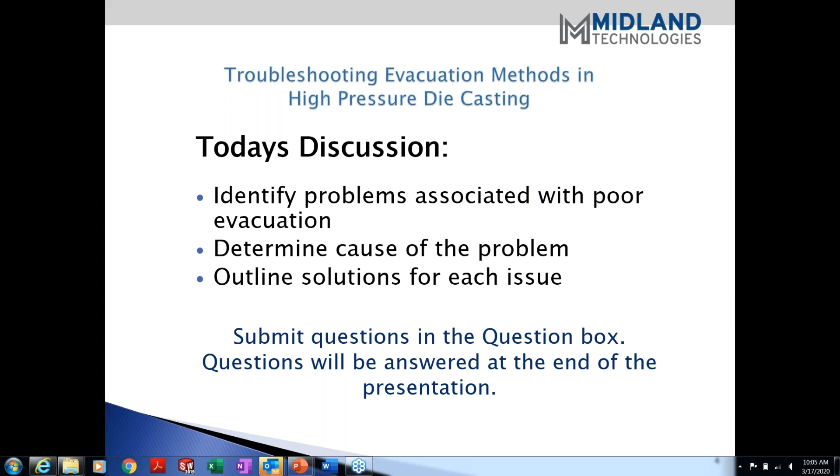So our first thing, look at what defects are related to the lack of adequate evacuation. The first part is surface defects: cold flow, cold lap, chill, non-fill, and swirls. Larry, can you go over a little bit more description on that? Sure. These defects are related to evacuation of the cavity. They can also be influenced by the amount of time it takes to fill the cavity, in other words, the cavity fill time, and also the temperature of the metal or the temperature of the tool itself when the metal enters it.

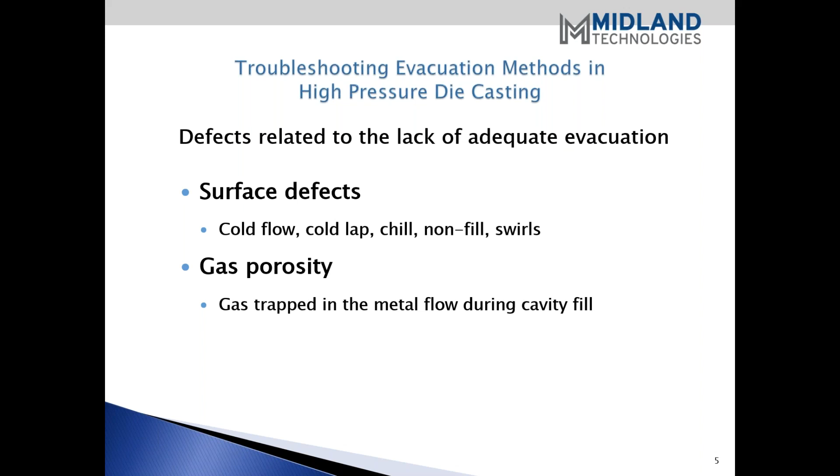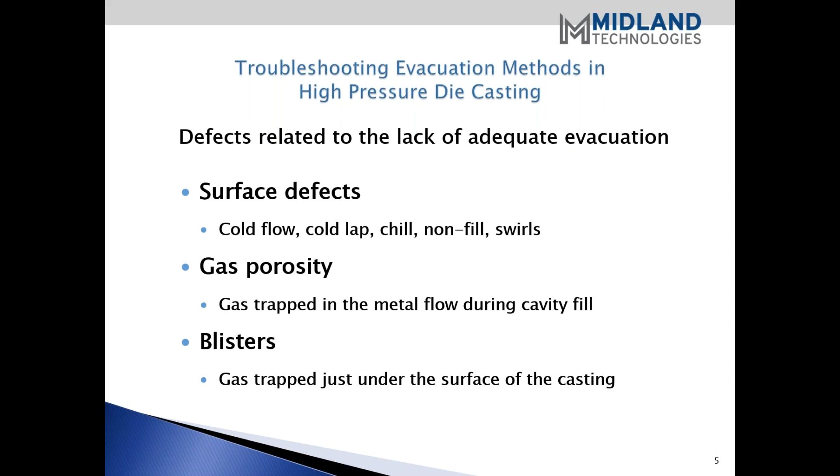Excellent. And then we also have gas porosity, which is very common. That's where the gas is trapped in the metal flow when the cavity is being filled. Blisters can also be developed, and blisters are gases trapped under the surface of the casting. And then we also have outgassing, a surface finish defect that occurs when bubbles appear during painting, plating, or other finishing processes.

And there's stained casting, which is a discoloration of the casting, and edge porosity, which is the coarse porosity at the gate. Larry, can you fill in more details of these types of things? Sure. Outgassing, of course, if you're in die casting and you're finishing parts, you're familiar with that condition.

It's internal porosity trapped in the casting at the time of solidification, and this porosity is generally closer to the surface of the casting, although the entire casting outgasses for the life of the product. Die casting just doesn't stop outgassing. It continues to outgas if you don't use some means of minimizing that gas during your injection of the metal, or it can be addressed at a later time.

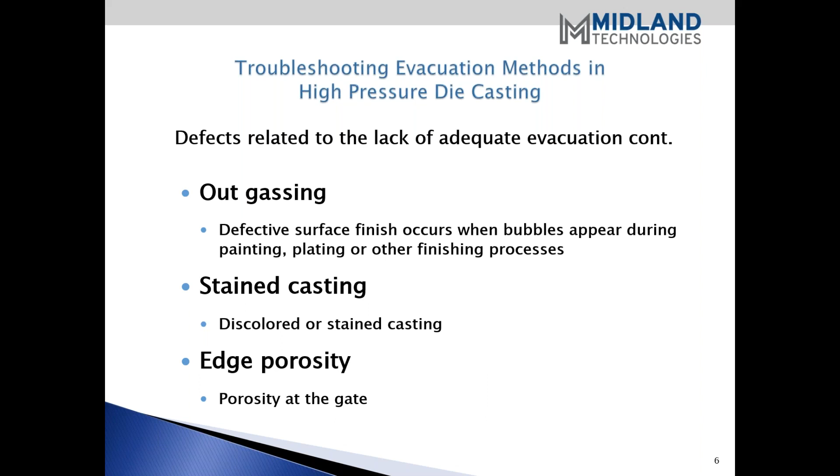Edge porosity, just as it says, is gas trapped at the point of the gate. It can occur around the periphery of the casting in different locations, but it's mostly associated with temperatures and/or the cavity fill time. So again, we can minimize that by having proper evacuation. And that's about it. Excellent.

Good. Okay, so the first one we want to discuss is insufficient evacuation, and there's a number of possible causes here. The first one we have is the improper size calculation of evacuation area. And this could be whether you're just venting or using a vacuum assist as well. And Larry, if you can kind of go over the solution for this cause.

Sure. The solution in this case, we have some proprietary software that calculates the area required to evacuate the cavity. And the attributes we use in those calculations are associated with the casting itself and the machine parameters. By performing these calculations, we use PQ squared. We arrive at a cavity fill time. We arrive at the area required to evacuate the cavity in a certain amount of time.

So it's important that some type of calculation be arrived at, and hopefully you would come up with some quantitative method of collecting the data to assure yourself that what you've arrived at is adequate and going to do the job. We've developed that over the years in applying this technology, vacuum technology assistance, in die casters.

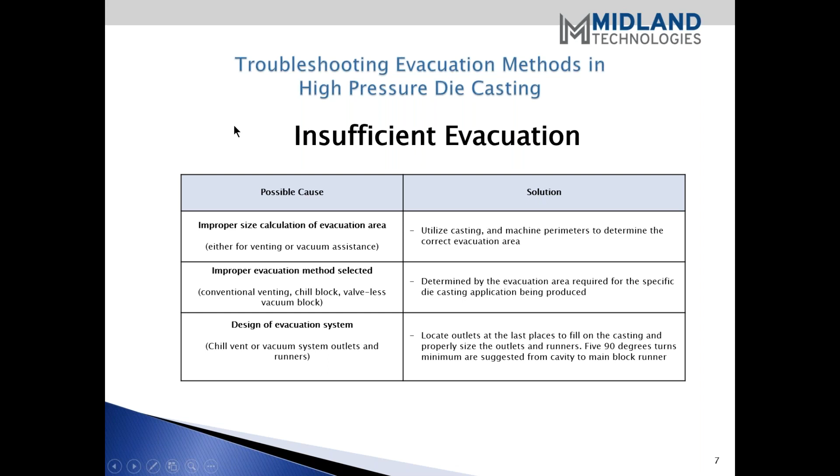Okay, we'll go on to the next slide here. We have a few more possible causes of inadequate evacuation, and misalignment of vacuum or vent blocks, and of course this can restrict the flow of the gas as it comes out. And Larry, if you can go over that a little bit more in depth.

Yes, there are some pretty straightforward and simple ways to determine this. One we've come up with, I know a lot of people have probably used it, is just using silver solder or lead solder, taking a strip of it and putting it in the block itself, and then closing the die up. That right away will show you the pattern and potential areas where you do have misalignment. That thickness, of course, indicates the gap that you've got in the block, and that gap's necessary for the gas to be evacuated.

So obviously, if there is that problem, you could go into the tool and make adjustments to the alignment. That's one of the reasons we have built keys in these blocks to assure proper alignment, whether they're chill blocks or a vacuum block. One thing I'll note is when you retrofit blocks to a tool, it's critical that you have proper alignment. I know from years in the shop, you run a tool for a time and the leader pins and the leader alignment system may become worn.

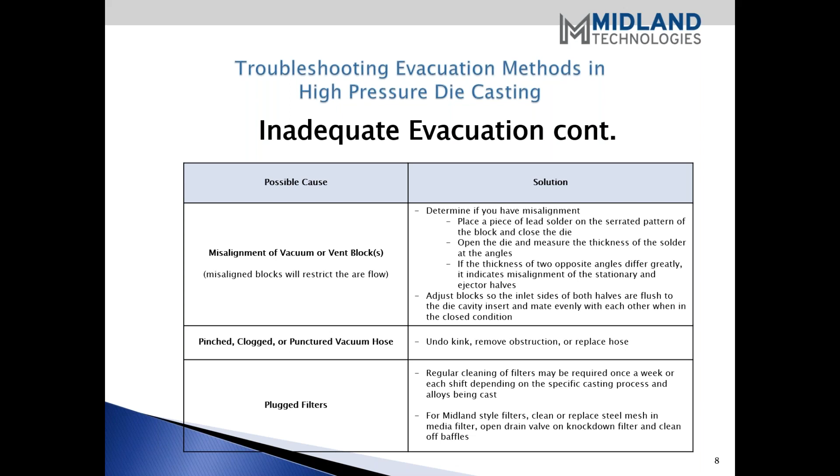We also have a valve that you can open if you might have a little bit of liquid in there that you can drain. We recommend that you monitor your process and determine when your maintenance will have to be done. Perhaps you can have a set of filters off to the side, and each shift replace the filters with the ones that you have in stock, and then take the old ones out and clean them up and get them ready for the next shift. So it's things that you'll need to look at with your preventive maintenance.

And one more thing with the inadequate evacuation is whether you have low or no vacuum. And Larry, if you can kind of go over this one as well. Sure. This isn't untypical, and we get a lot of questions from customers if they are having problems: well, what can I do to measure the amount of vacuum I'm pulling? And there's different ways to do it.

I like to do it at the pour hole, and if you do that, it's a simple matter, really, of plugging that pour hole so that it's obviously not leaking, and then installing a vacuum gauge in the device that you use. I've used rubber stoppers. I've used pieces of rubber wrapped around the shot sleeve to have the same ID OD between the sleeve and the rubber membrane, and then clamp it on and put a hole in it. Pretty straightforward, and close the die and activate the vacuum and read the gauge.

And that'll show you right away if you've got a plug, and you've got some obstruction in the block, because that's what we're looking for in this particular instance, is a blockage somewhere in the system. It can also be your filter plugged. That's a possibility, but you get a reading then, and of course we suggest making sure that you keep the blocks clean.

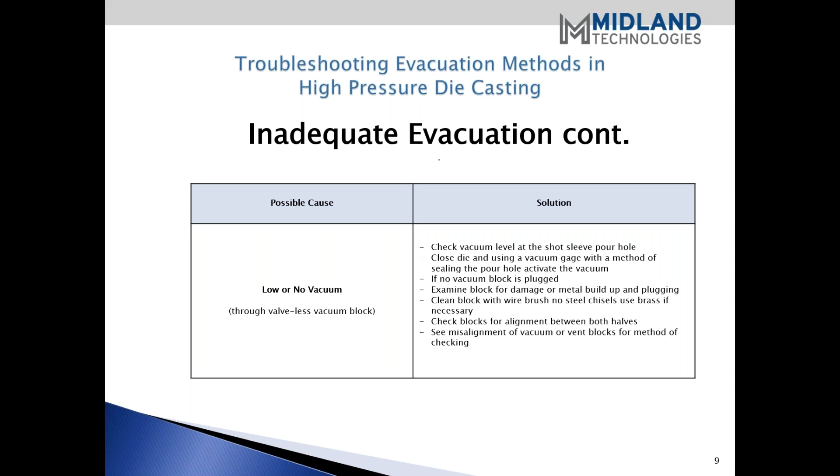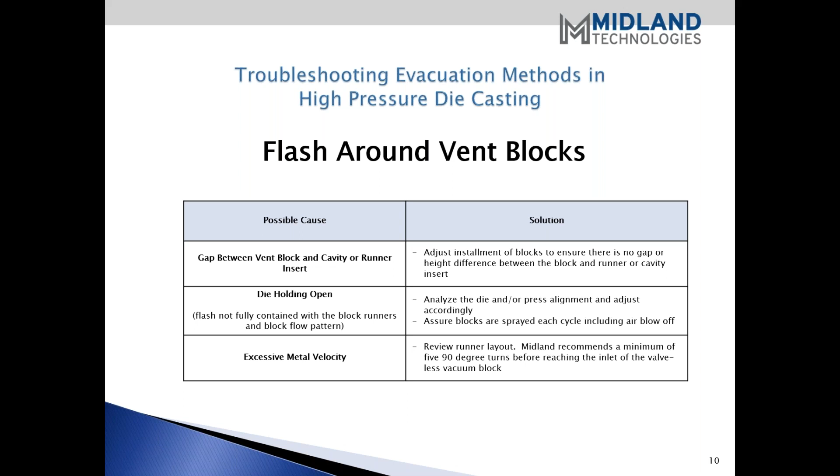Now, conversely, you want to decrease the velocity of the metal when you leave the casting. So you want to do the opposite. You want to go from a smaller to a larger area when you leave the casting, and that will help decrease the velocity, hopefully, if designed properly.

Excellent. So the next issue with evacuation that might be out there is the failure to achieve expected vacuum level beyond the solenoid valve. And one of the causes is a low vacuum level, and primary at the pump or the tank. And some of the things you want to do is ensure all drain valves are closed, ensure that there are no leaks at each of the junctions of your vacuum line, and of course the pump itself needs to be maintained.

You want to check your oil level and the oil quality, and change them as needed. And there's also inlet filters and such that you either want to clean or replace. And in some cases, depending on how old the pump is, it may need an overhaul. There are overhaul kits available that basically replace some seals and typically the filters as well. But you'll get everything all tight, so your pump is being used efficiently and can create the vacuum level that you need.

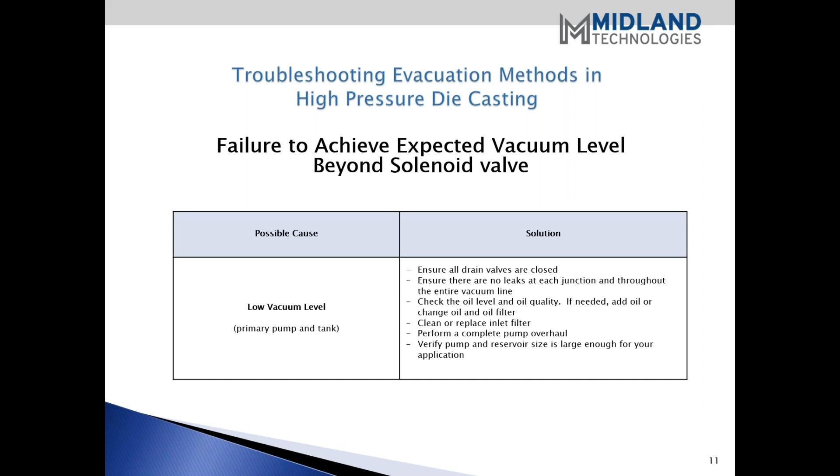And the next troubleshooting occurrence is metal fines in the vacuum hose, and the very first cause is no filtering, so we certainly do suggest that you install a filter close to the vacuum block. And again, with our hookup kit from Midland, we have a knockdown filter and a media filter. And as we talked before, these filters do need cleaning. They can get clogged depending on your applications. Some environments may not see as much particles go through. Other environments may have a little bit more. So it kind of depends on your situation.

And then again, high metal velocity can also cause metal fines in your vacuum hose. And this again goes back to the runner layout and putting in the 90-degree turns and such. And Larry, do you have anything else to add with the metal fines? No, other than I experienced those early on. Almost all jobs I've seen have some fines in them. There's just almost no way you're going to completely eradicate the fines, and of course that's the reason for the filtering. You're going to experience it, but you can minimize that by keeping control of the metal velocity as it goes through the block, at least the amount of it. Right.

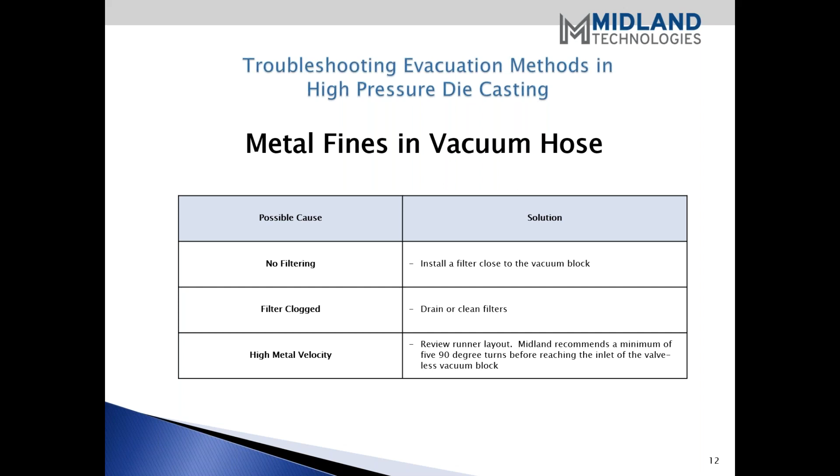Okay. Next issue is the metal sticking to blocks, serrations, and erosion. And again, the possible cause, we hit it again right away, the excessive metal velocity. And again, we're still emphasizing a lot the runner layout and putting the 90-degree turns in there. And we recommend vent or vacuum gates as opposed to overflows for attaching runners. And then also you have possible causes of damaged block. And of course you want to replace blocks if there are any pits, nicks, or broken teeth.

And Larry, can you talk a little bit about cleaning up a block, what signs where you may be able to clean it up, or other times where you're going to have to replace it? Yeah, well, you'll know when you have to replace it, of course, when there's pieces missing from it or teeth are damaged. Of course, we always recommend you never use steel on them, and recommend that you use a wire brush of some sort to remove any buildup that you experience. If you solder, we mentioned solder down below. When that problem does come up, the best means to completely remove solder is to polish.